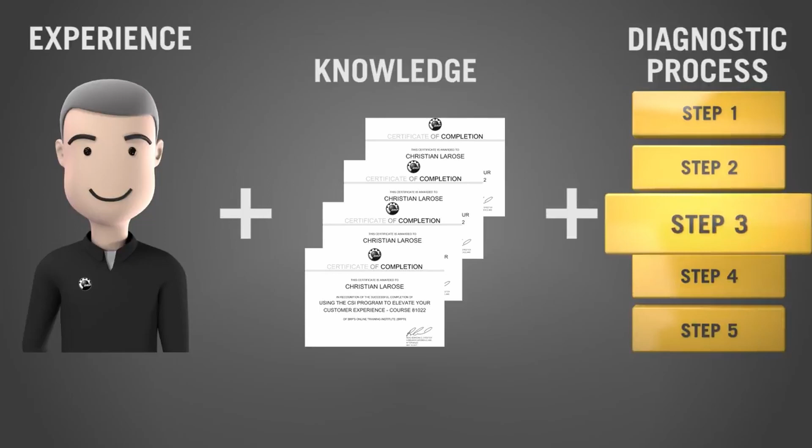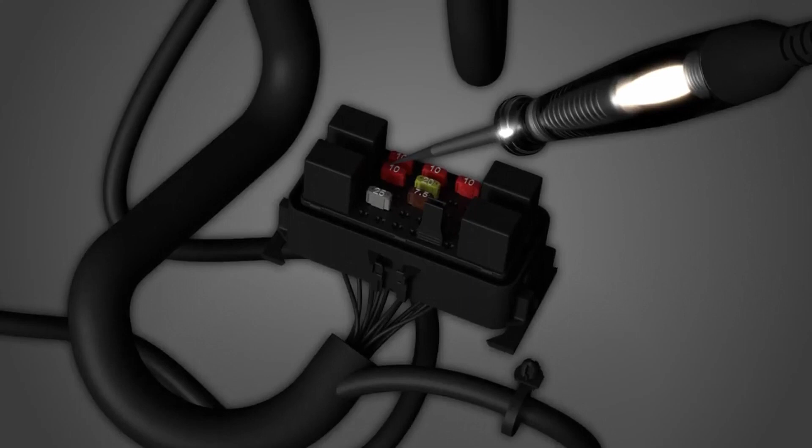Most efficient electrical troubleshooters work methodologically, whether they are aware of it or not. They only check the components that can cause the problem and perform all the easiest checks first.

This course will introduce the 5 steps of an efficient electrical troubleshooter, which are: verify the complaint, determine the related symptoms, analyze and isolate the faulty circuit, fix the problem, and test for proper operation.

As you gain experience, you will most likely adapt or combine some of the steps to better suit your style and work environment. Remember that part of being efficient is being able to adapt to the information at hand.

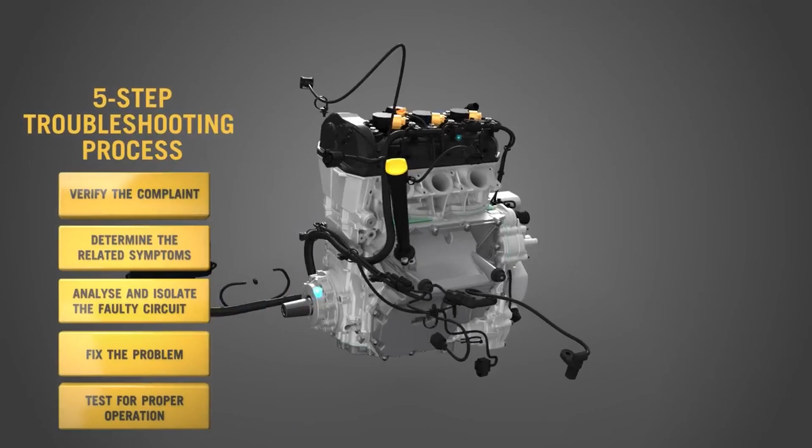In this course, we'll be simulating a typical electrical problem and following the 5-step process to troubleshoot it. These steps should be applied to any electrical problem that you may encounter.

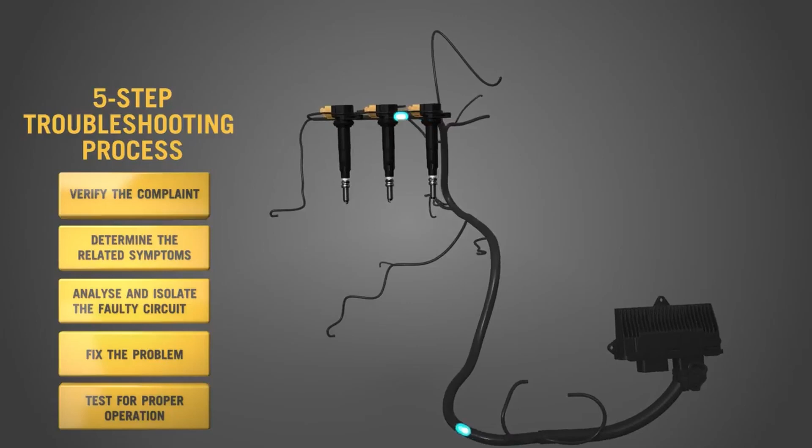This training video will outline one of the simplest troubleshooting guidelines to follow. This 5-step troubleshooting guideline should be used for all your troubleshooting needs and can also be applied for non-electrical issues.

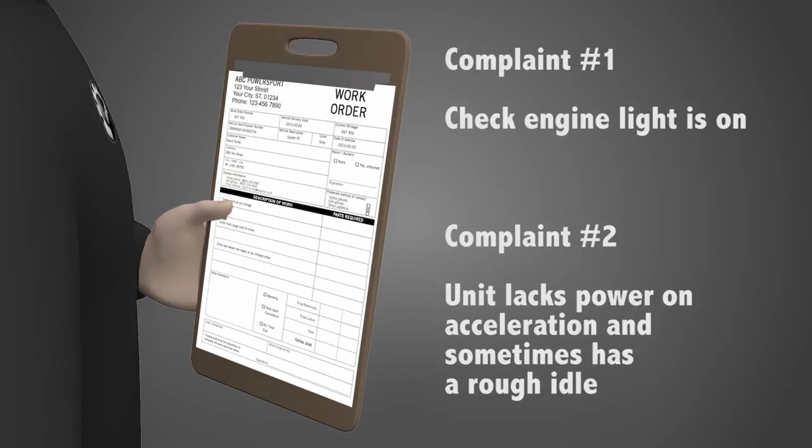Imagine that you've just been handed a work order with 2 customer complaints. The first step in the diagnostic process requires you to be able to identify and reproduce the customer's complaint. It also means you have to determine if the complaint represents a problem or not. And finally, if there is a problem, you need to determine if it is continuous or intermittent.

Take the time to fully understand the issue the customer is facing. It's possible that the description of the complaint on the work order isn't described the same way you would. Clients often have difficulty communicating the issue the vehicle is having. The situation can also be made worse if the work order doesn't include enough information to guide your efforts.

For you to work efficiently, there needs to be a clear description of the complaint and any symptoms on the work order. It is possible that what may appear to be a problem to a customer may actually be normal behavior for the vehicle.

It's your responsibility to know the vehicle and systems well enough to be able to determine if the complaint is founded or not. If in doubt, refer to the operator's guide or the general system description in the shop manual. These resources clearly explain what should happen in various circumstances.

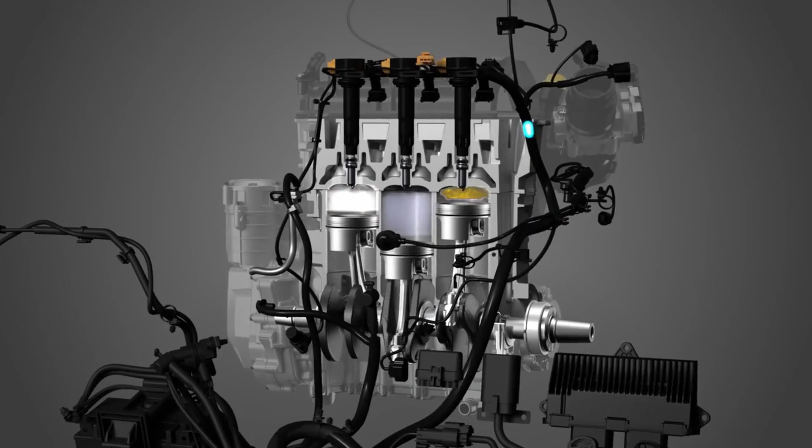If you are able to verify the complaint and have determined that a problem exists, you're ready to move on to step 2. However, if you cannot duplicate the complaint, you're probably facing an intermittent problem.

If possible, put the unit aside and have the customer show you the problem at a later time. You can also call the customer yourself, explain the tricky situation, and get the necessary information that will allow you to reproduce the problem. Intermittent problems require as much information as possible on the conditions that exist when the problem is there.

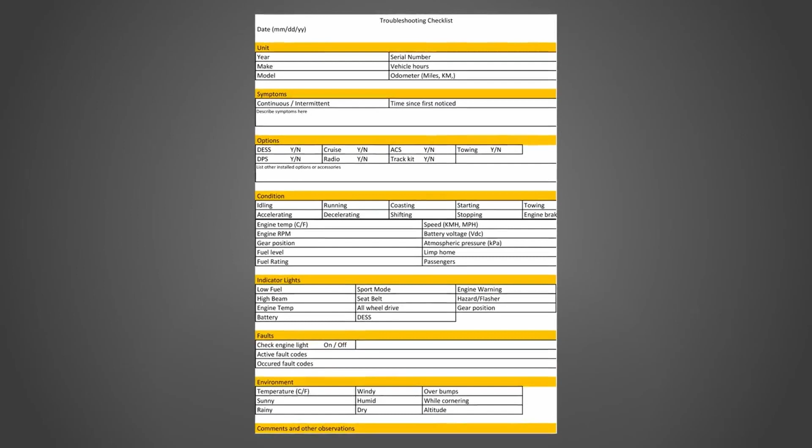You should use the BRP Troubleshooting Checklist as a guide to gather as much information as possible. Remember, you cannot diagnose or repair a problem that you cannot reproduce. Swapping parts just to see what happens will usually result in wasted time and money for everyone.

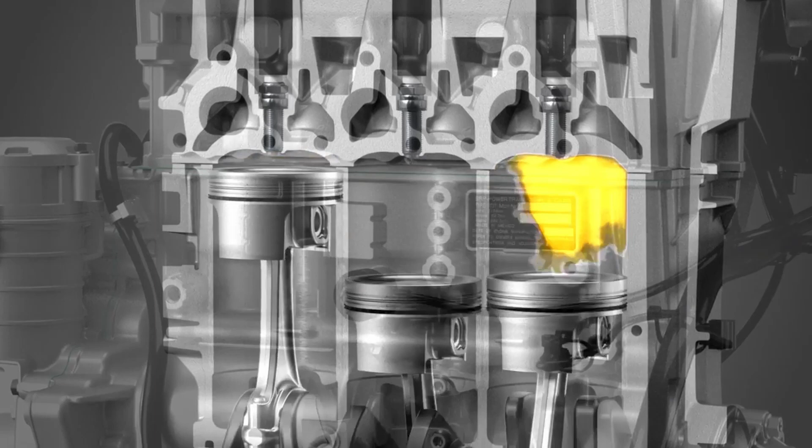Sometimes, several complaints are related. It's also possible that there is a problem that the customer hasn't noticed or isn't complaining about. Looking for and finding any other issues will usually help you narrow down the list of potential problems.

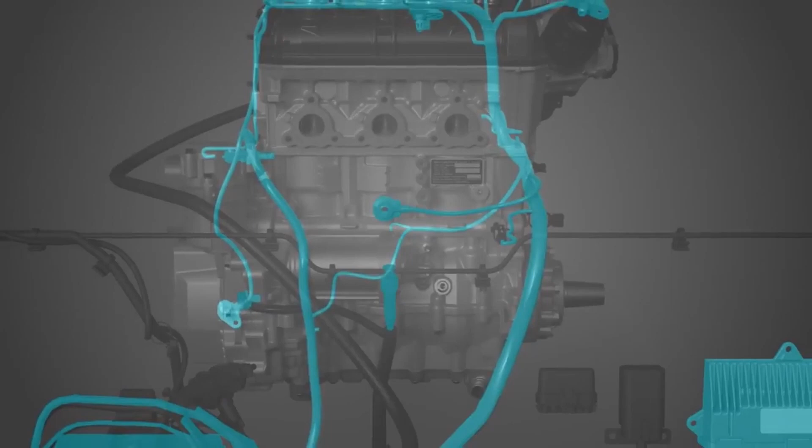Looking for related symptoms enables you to concentrate on common components. Try using as many related and unrelated systems on the unit and look for anything that isn't working normally.

It's possible that the ECM has also noticed the problem that the customer is experiencing and has already set a fault. You should be happy when you find a fault code because it guides your troubleshooting, so use it as a tool. The tools required to complete this procedure are the ECM adapter, multimeter,

multimeter, T-harness, test light, and spark tester.

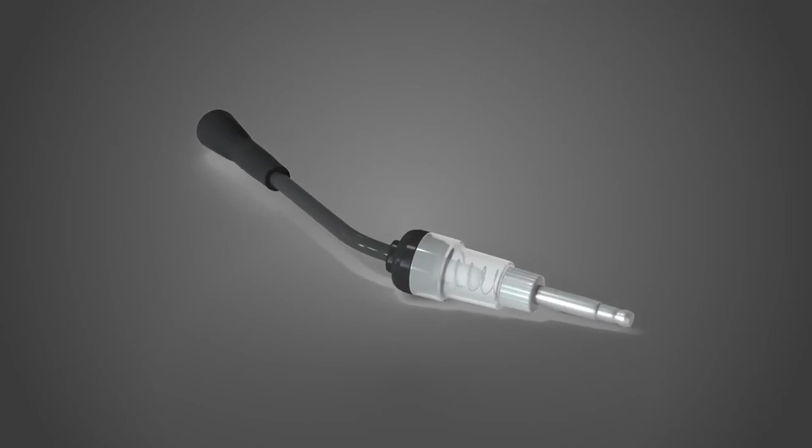To find the cause of an engine performance problem, you're going to have to use all the information available to you in order to quickly pinpoint and isolate the faulty system.

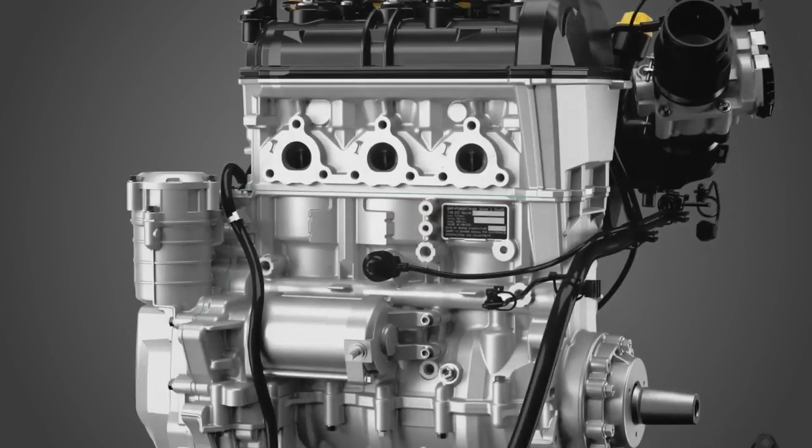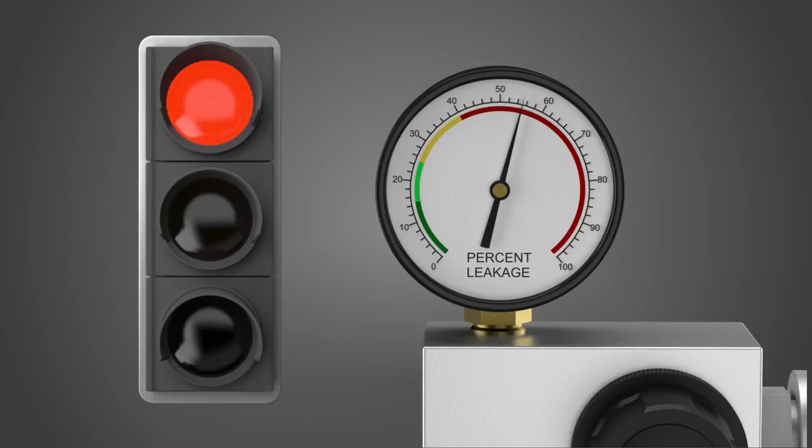Performance problems can typically be either mechanical or electrical in nature. A mechanical problem can include low cylinder compression or excessive combustion chamber leakage, restricted exhaust or intake airflow, incorrect cam timing, or any other mechanical failure that can affect combustion.

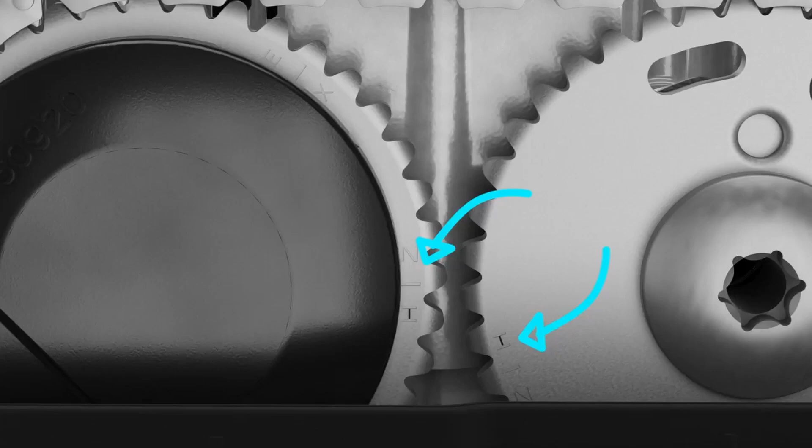An electrical problem may be rooted in the electrical system, ignition system, the fuel system, or the engine management system, or EMS. Check for fault codes and update modules as suggested by BUDS 2.

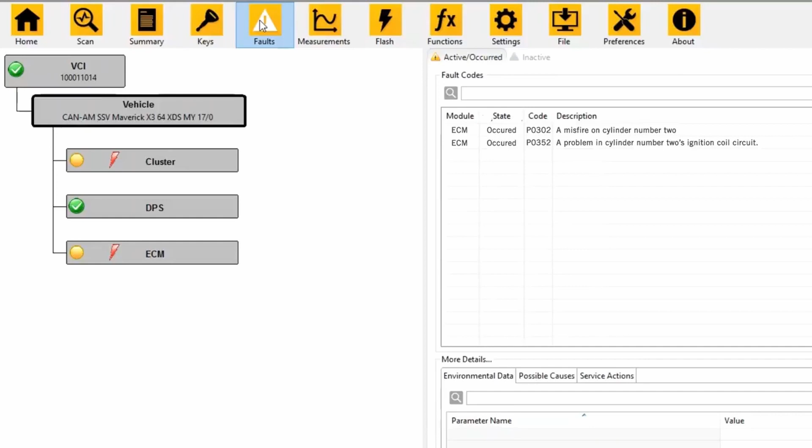In our example, BUDS 2 is displaying two fault codes: P0302, a misfire on cylinder number 2, and P0352, a problem in cylinder number 2's ignition coil circuit.

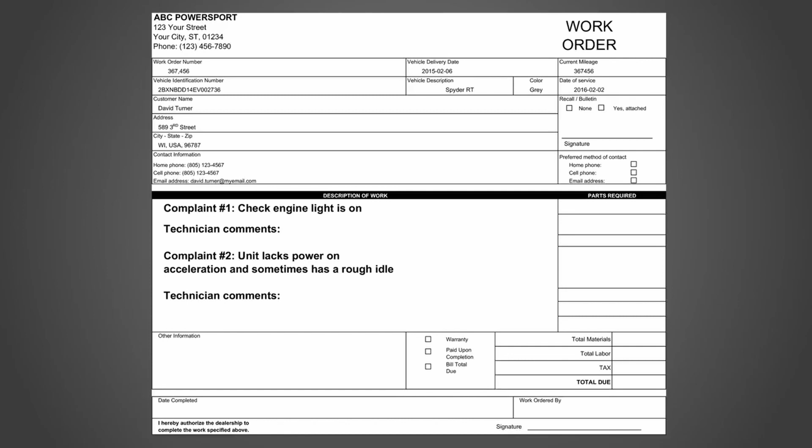Just like customer complaints, sometimes two or more faults can be related. Always ask yourself what the faults have in common, or if one fault can cause the other. In this case, a faulty ignition coil circuit can cause a misfire on the same cylinder, but a misfire cannot cause a faulty ignition coil circuit.

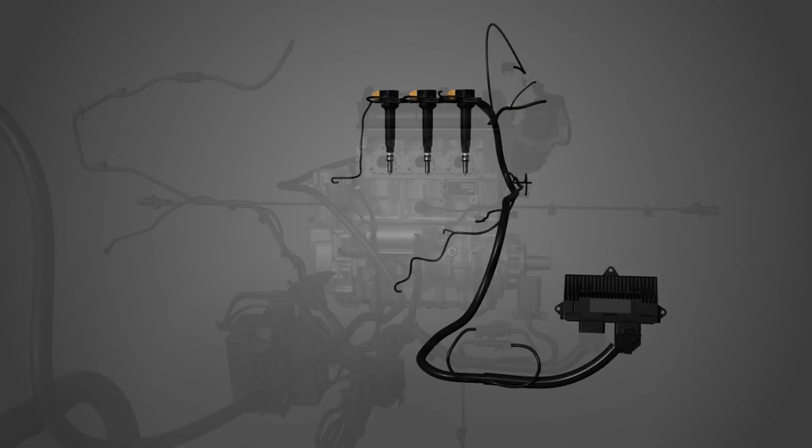When it's time to start testing components, always focus your first efforts on the component or system that is more likely to be the root cause of the problem. Both of the fault codes point to a problem with the ignition system. A fault in the ignition system can definitely cause the vehicle to lack power during acceleration. The next step will be to determine how much of the system or circuit is affected.

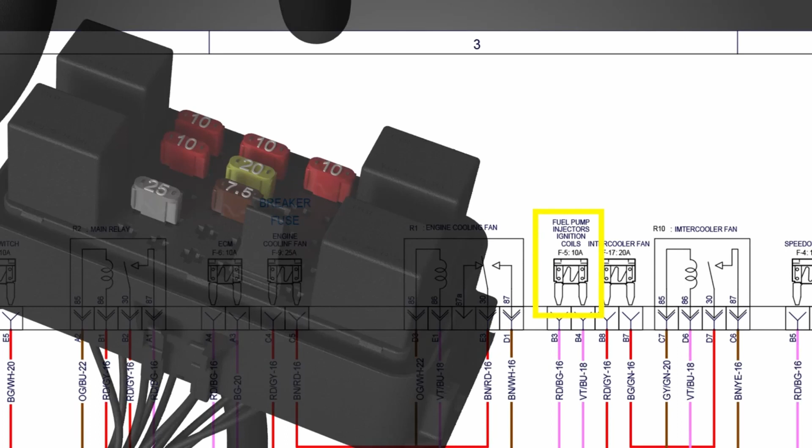As soon as you suspect that you are dealing with an electrical system problem, it's time to consult the wiring diagram found in the shop manual. Identify the components in the ignition circuit for cylinder number 2. There's a fuse, the HIC connector, which connects the chassis harness to the engine harness on all BRP products, the ignition coil, and the ECM. As a tip, we suggest you use the color diagram on the Knowledge Center.

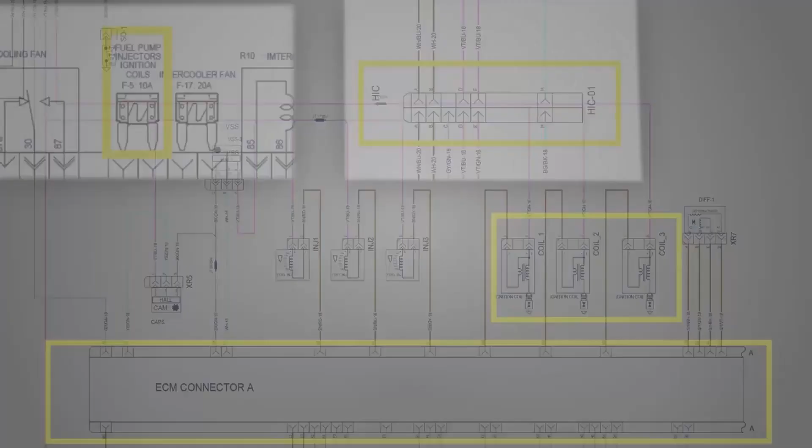It will save you time. Color diagrams identify power, ground, signals, and other useful information that make them easier to interpret correctly. Look for other components on the same circuit. All of the ignition coils are on the same circuit. Use this information to determine if the entire circuit is affected or just a part of it.

Now that we've confirmed the complaint, mapped out the circuit, and gathered all the necessary information, we're ready to start testing. Remember to always check the easiest components first. Diagnosing a problem is a process of working methodically and eliminating possible causes. Some circuits will be easier to test than others. Usually, the easier a connector is to reach, the easier it is to test.

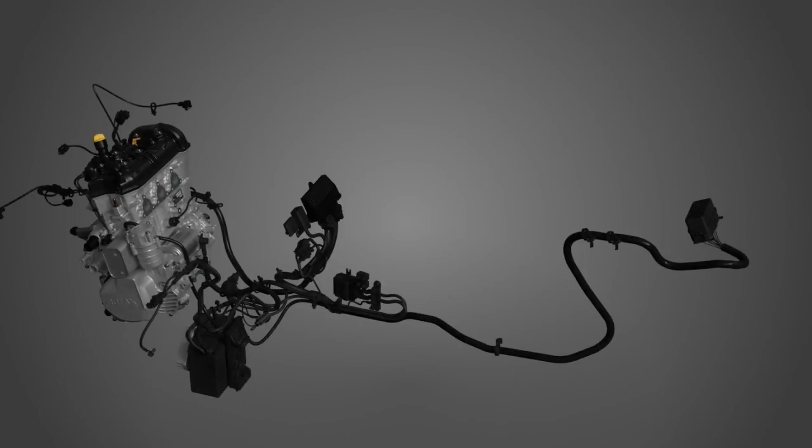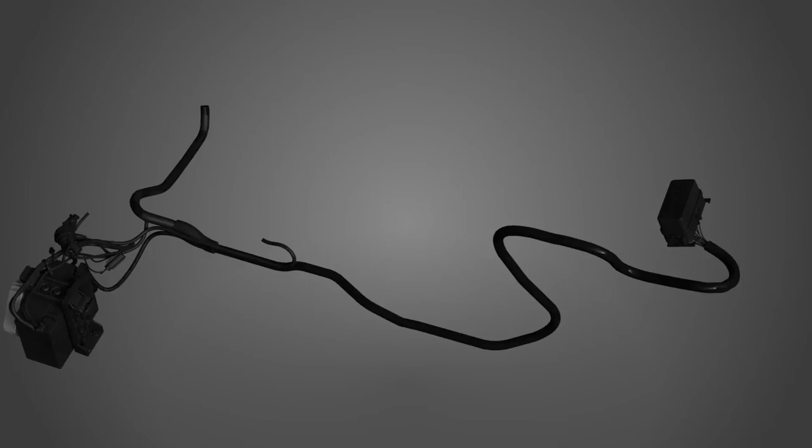If you've mapped out a circuit with easy-to-reach connectors, you might want to try the split-half method. With this method, you make the first test in the bad circuit near its midpoint. The idea being that if the circuit is good or bad at the midpoint, you've just isolated the faulty half of the circuit and eliminated the other half.

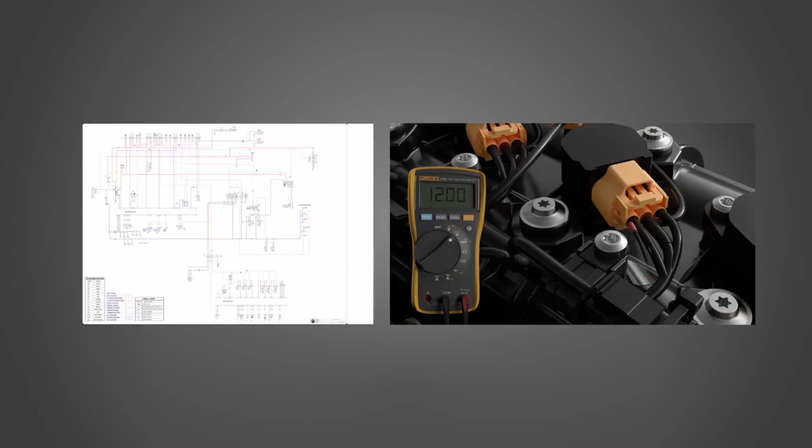Diagnosing a problem is a process of elimination. Use your understanding of the wiring diagram and electrical testing methods such as voltage drop tests, resistance checks, voltage measurements, or ground checks to determine the most appropriate type of test to use. You would now continue to apply the split-half method to the remaining bad half of the circuit until you locate the cause of the problem.

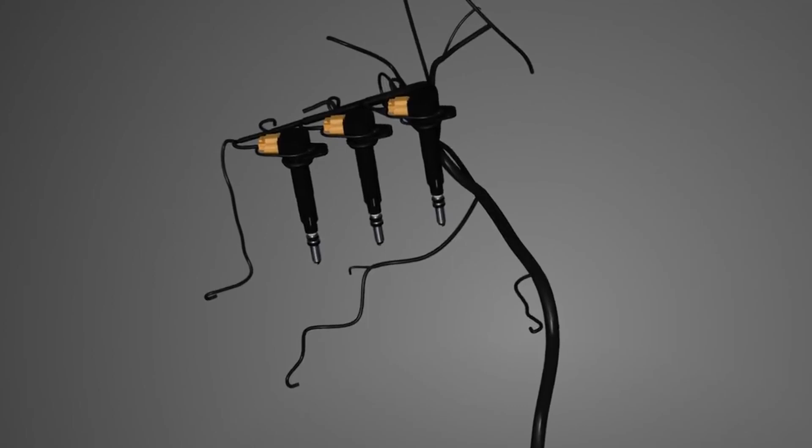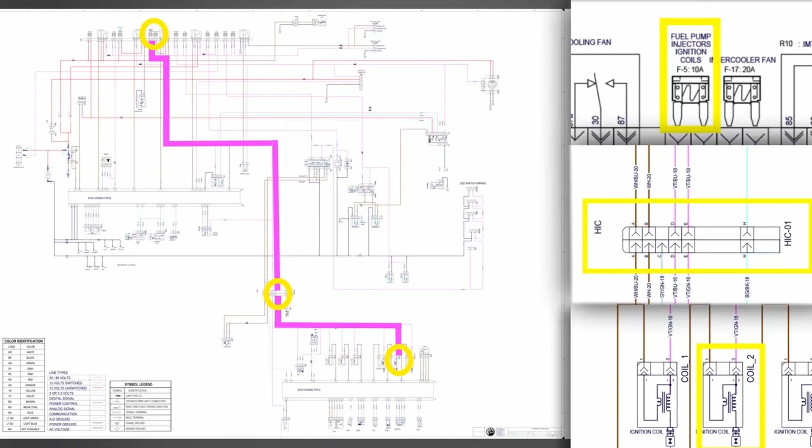Working from power to ground is probably the most common way of approaching electrical diagnostics, as there's no jumping around the circuit. However, if you have noted that several problems on the unit have a common point, you should start the inspection at that point. And you should always start testing at the easiest access point or at a component that has a history of repeated failure. Let's take a look at each component and see if it can be the cause of the complaint.

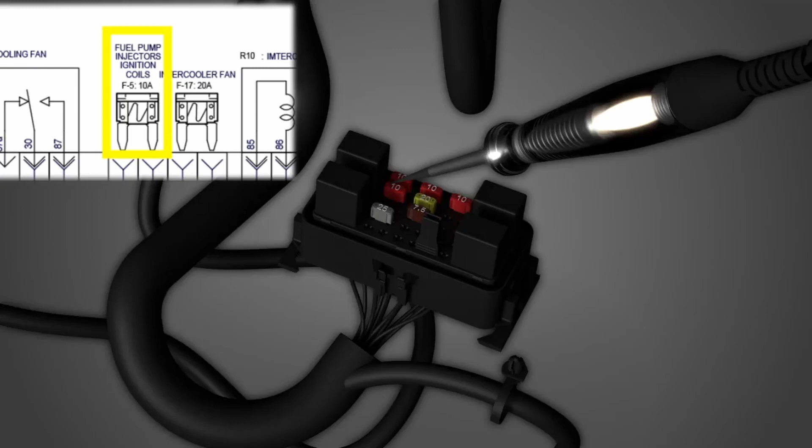The fuse may be burnt, but if it was, there wouldn't be battery voltage to any of the ignition coils. In other words, the engine wouldn't run. On this vehicle, all engine coils receive power from the same fuse, so we can rule out the fuse as a possible cause. Now that we know the fuse is good, it's time to make sure that power is available at the ignition coil's connector.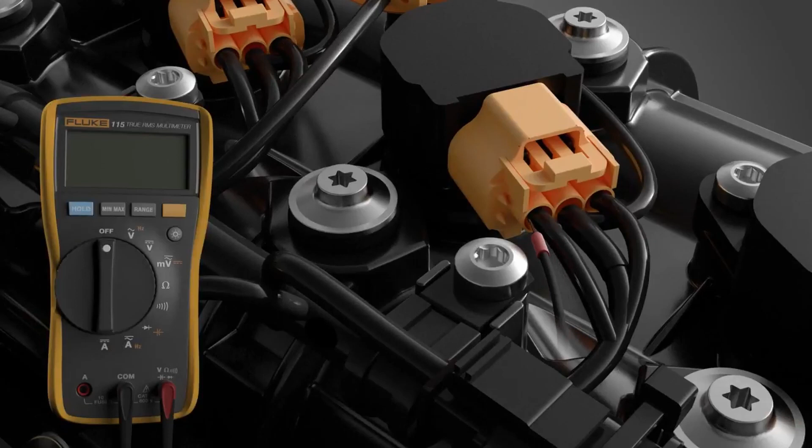The wiring harness could be shorted. Check for power at the ignition coil connector when the unit is powered up. The pink line on the wiring diagram indicates that the ignition coil should receive a switched 12 volts at pin 3. Measuring 12 volts at this point indicates that the harness does not appear to be at fault.

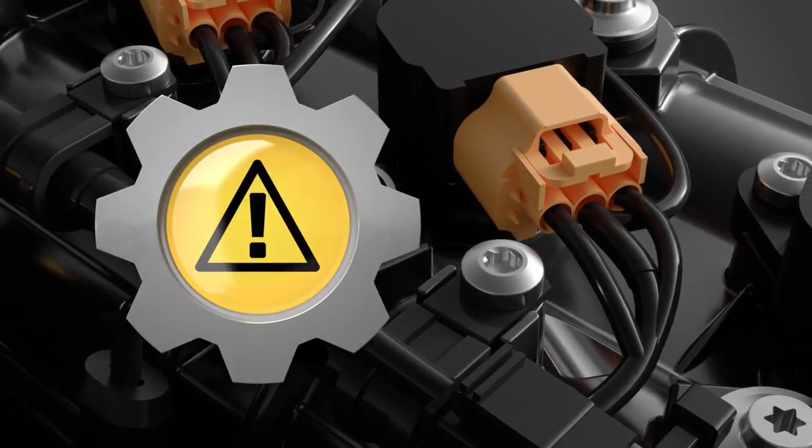Please note that when probing connectors, make sure not to open the terminals. This can create intermittent problems that are very difficult to locate. Also, be careful when back probing sealed connectors. Damaging the wire seal will allow water to enter and corrode the terminals. Try using a universal T-harness, also called breakout leads, inserted into the terminals. Using the correct T-harness will allow you to accurately perform the test without damaging the terminals or seals.

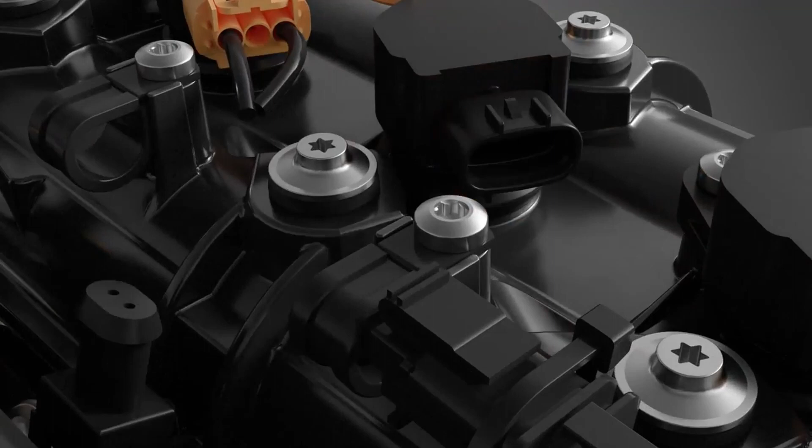Here's a tip. If you suspect a problem in the harness, gently wiggle, push, and pull on the harness to see if any of the readings change on the multimeter. The next suspect component to test is the ignition coil. Since an ignition coil is easily disconnected, now is a good time to measure resistance. The shop manual provides specifications for measuring the primary and secondary windings of most ignition coils. Here's another tip.

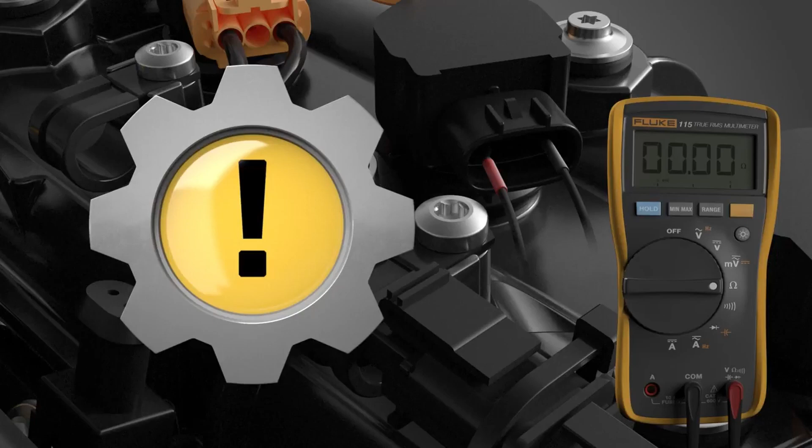Although a component should be replaced if the resistance is out of specification, a measure within specifications does not guarantee that the component is performing as it should. One last thing to check: the ECM and wiring to the ECM.

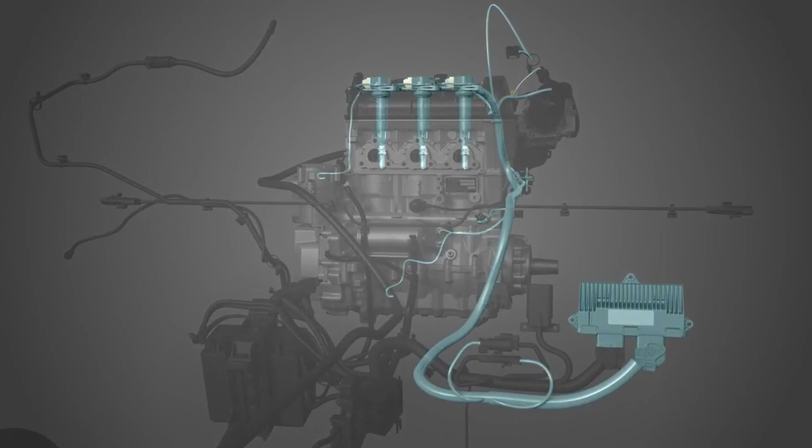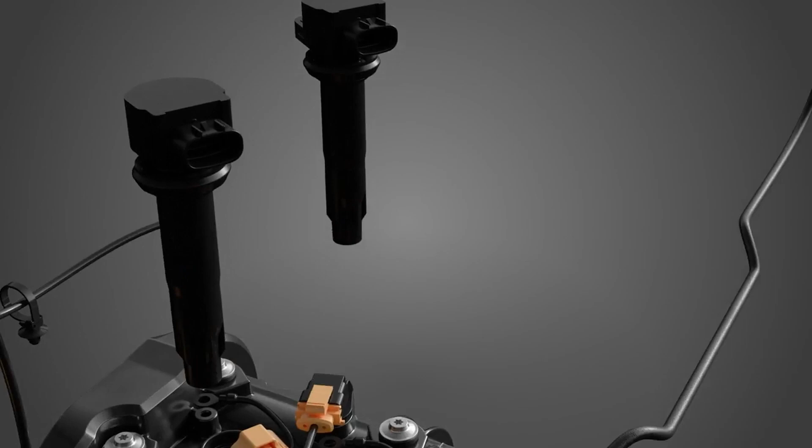This is where you have a choice. You can either swap ignition coils between the faulty cylinder and a known good cylinder, or you can check the wire between the ECM and the ignition coil. The choice will often depend on the vehicle. Whenever possible, swap coils because this step will confirm the diagnostic and the correction at the same time. If the vehicle only has one coil pack, you will need to test the wire to the ECM.

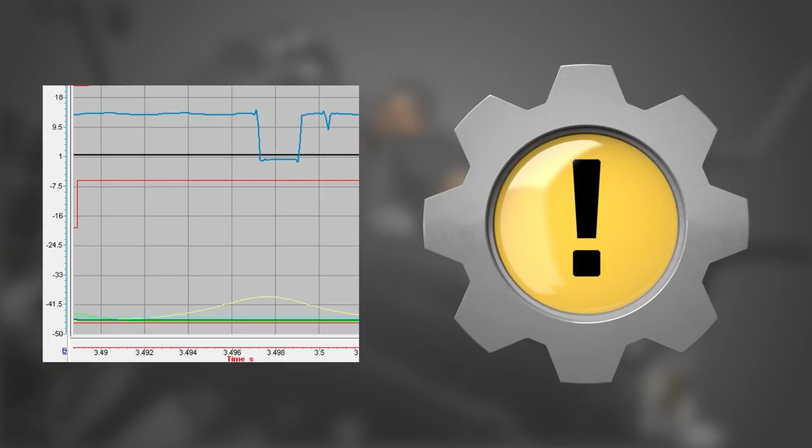Here's one last tip. If you have an oscilloscope, you can view the waveform on the power control circuit by back probing the ignition coil connector and using BUDS to activate the ignition coil. This is an easy way to ensure that the ECM is properly controlling the ground side of the primary coil. The blue tracer line shows the voltage in the circuit dropping from battery voltage to 0 volts when the ECM switches the ignition coil control circuit to ground.

Once you swap the coils, you can either reassemble everything, clear the fault codes, start the engine, and see if the misfire fault moves to another cylinder. Or you can install a spark tester on the coil and use BUDS2 to activate the ignition coil. If the known good coil works on cylinder number 2, and the suspect coil doesn't work when installed on another cylinder, then the problem is definitely the ignition coil.

In this scenario, if you cannot swap coils, disconnect the ECM-A connector and install the ECM adapter tool on it. Use the multimeter to measure the resistance between the ignition coil connector terminal 1 and the ECM-A connector terminal M2.

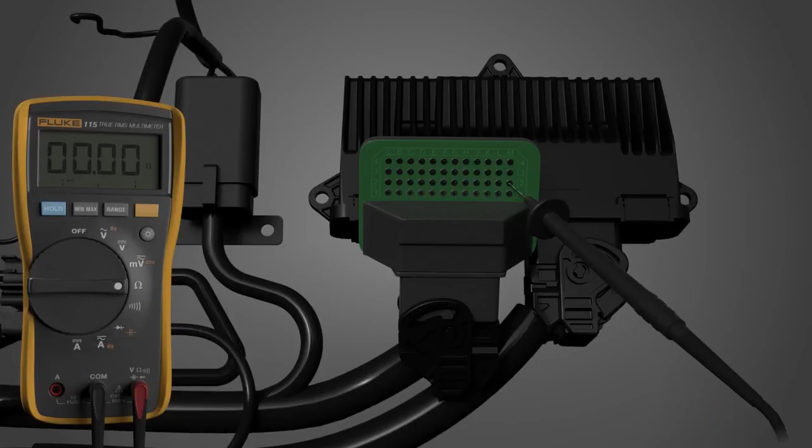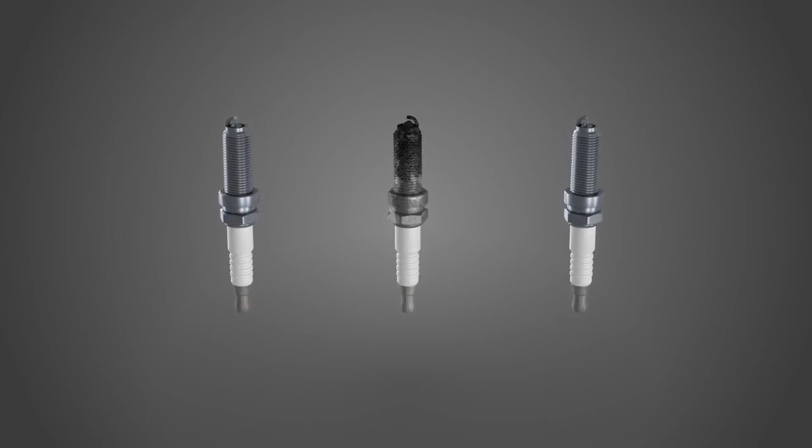Finally, now that you have confirmed that there is a misfire in cylinder number 2 caused by a faulty ignition coil, don't forget to check for any collateral damage, or in this case, a fouled spark plug. This is a particularly important step. Sometimes one problem causes another.

Always see the diagnostic process through to the end. In this case, it isn't enough to stop at the ignition coil. It is possible that even a good ignition coil will not be able to fire a spark across a fouled spark plug. A faulty ignition coil caused the initial complaint. The misfire also created a rich condition inside the combustion chamber and fouled the spark plug.

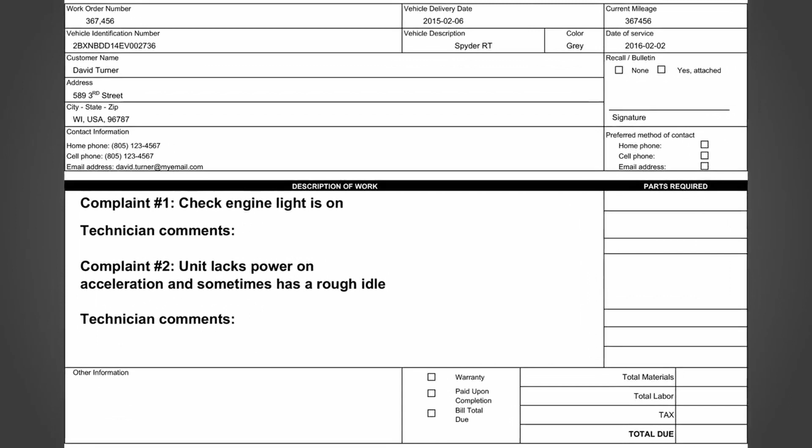The owner was complaining about a lack of power during acceleration. The defective components can most definitely be the cause of the owner's complaint. At this point, you should be confident preparing an estimate to replace the ignition coil and the spark plugs. As you know, this will fix both the symptoms and the cause of the customer's complaint.

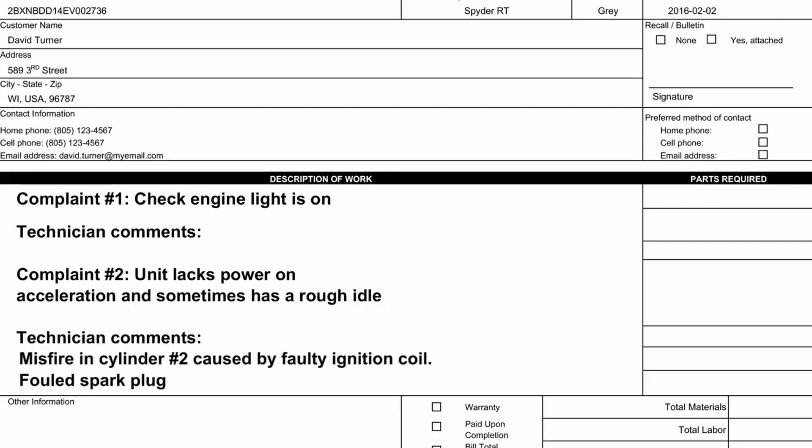Now, it's time to prepare a parts and labor estimate and contact the vehicle's owner. Rephrase his complaint to make sure you are both talking about the same thing. Explain that you were able to reproduce the problem, confirm his complaint is real, pinpoint the cause, and explain that you have prepared a detailed estimate for the repair.

Once he has agreed to the repair, proceed with the correction. Use the shop manual and follow the repair procedure. You can also search the Knowledge Center and community for tips from other technicians on performing the repair.

Once the repair is complete, it's time to test the unit under the same conditions that you used to confirm the complaint at the beginning of the diagnostic process. This is the only way to make sure that the unit is fixed and that the customer will be satisfied with the repair. Part of the process is to never assume that there is only one problem.

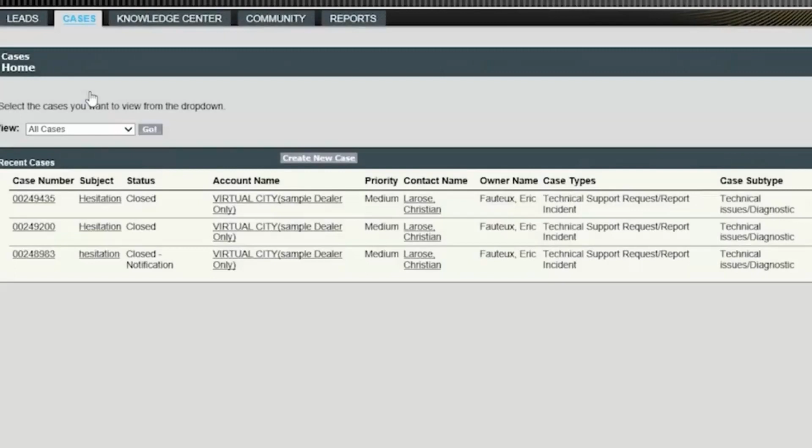For example, a fouled spark plug can be caused by a rich mixture in the combustion chamber because of a defective manifold absolute pressure sensor signal, in which case replacing the fouled spark plug would only fix the symptom and not correct the root cause of the complaint. If in doubt, or feel as if you cannot find the root cause of the complaint, try creating a web case to see if others have had similar problems.

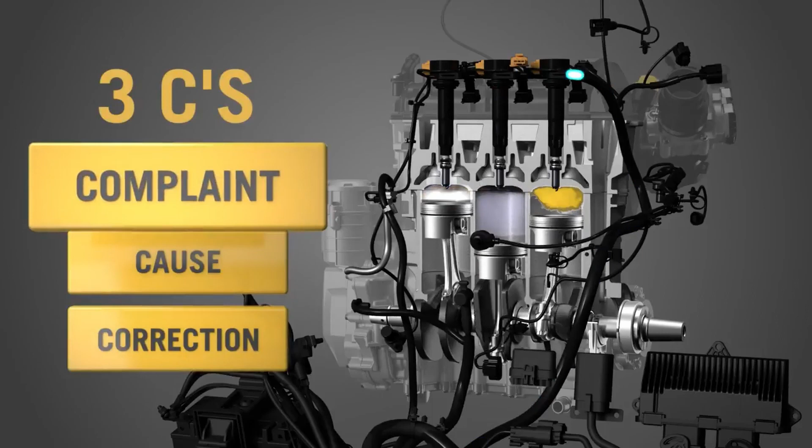In summary, the entire process can be broken into 3 sections, often referred to as the 3 C's. The complaint comes first. This is often the reason why the vehicle is at the shop in the first place. The next step is to methodically test and eliminate all potential causes of the problem until you are left with the root cause. And finally, once you have repaired or replaced the defective component, make sure that you have corrected the owner's complaint. Following the 5 steps as outlined in this course and making sure you have addressed the 3 C's will make your next troubleshooting experience a piece of cake.